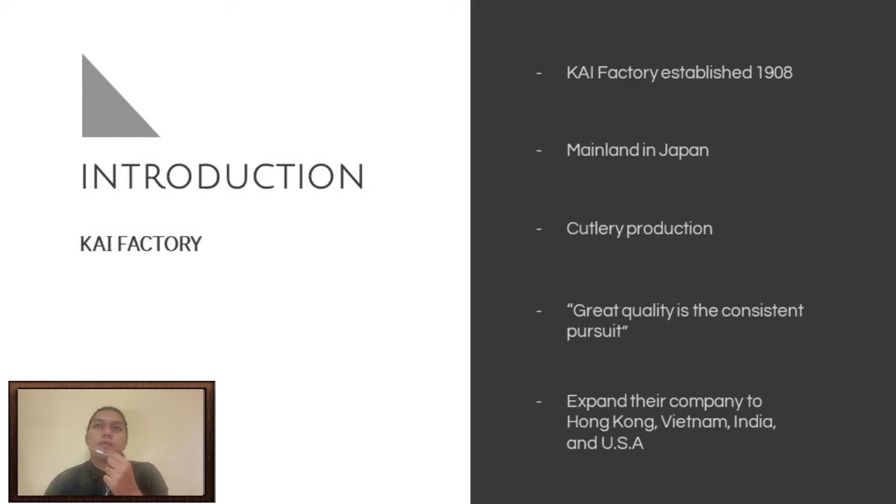In India, this was Kai's newest overseas factory, and it is mainly responsible for the production of razors, kitchen knives, and nail clippers.

At the Hong Kong factory, this factory is responsible for shape forming, assembly, packaging, and shipping of razor blades imported from Japan.

At the Vietnam factory, this factory plays an active role as the exporting base for the Asian and European markets. This factory started from producing razors for females and thin leaf type nail clippers for Japan.

At Oyana factory, Sembiki factory, Tawara factory, and Yamato Tsurugi factory, those factories are in Japan, mainly responsible for producing razor blades, medical blades, and kitchen knives.

At the USA factory, this factory took over an American traditional knife called Kershaw, a traditional American knife. Kershaw is an important part of American people's everyday life, used for opening parcels, camping, fishing. Those Americans always use Kershaw in their daily lives.

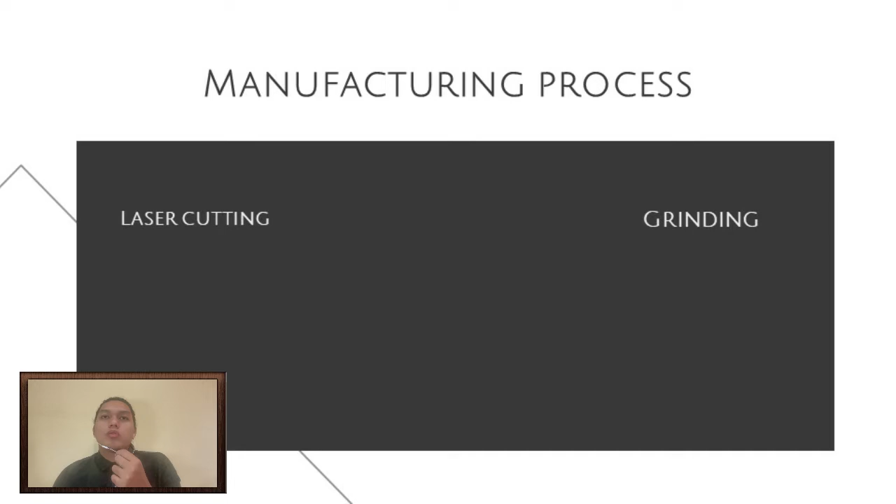Next, the grinding process. The blade surface is polished to make it look beautiful by using a grinder. Then the thermal process is used to get the hardness and tenacity for all equipment produced.

Next, the shot blasting process. This process is used to clean the surface of the tools using particular glass shots against the blade at a high speed velocity, so it will clean the surface.

The last manufacturing process they use is the handle molding process. The handle part is molded by pouring heated resin into a mold set with the blade, and then it will shape the handle for the scissors, knife, or razor that they produce.

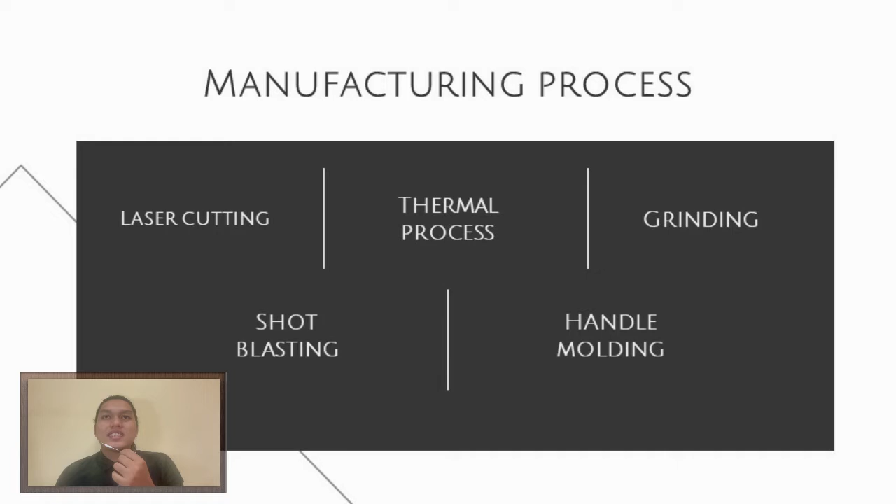The first design concept used by this company is consistently producing blades from its inception. The design was created not just to cut, but the company strives for a sharper and smoother blade, and their endeavor continues. The second one is handmade work for a value-added process.

Most of the processes in Kai factories incorporate handmade work in many production processes, which enables both stable sharpness and usability that cannot be achieved by using machinery automation processes alone.

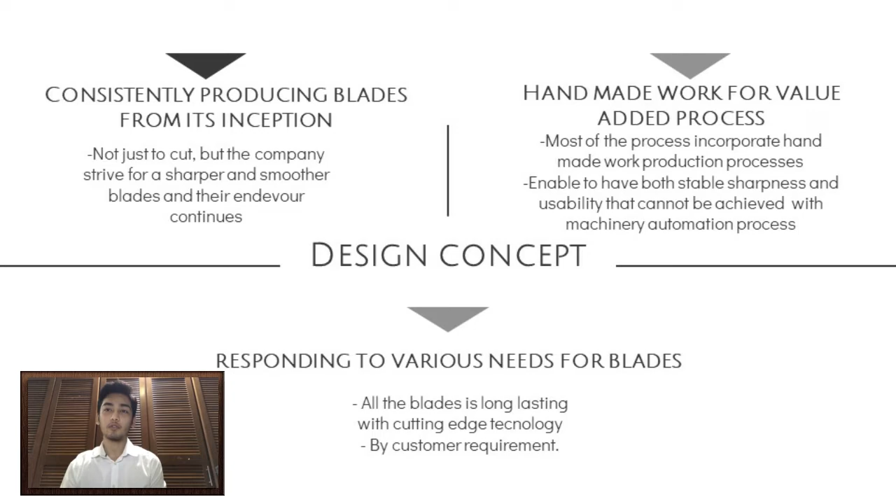The third design concept used by this company is responding to various needs for blades. There are many types of blades serving different purposes, and it's their job to make sure all blade designs can be used based on their purposes at maximum efficiency. All blades are long lasting with cutting edge technology, according to customer requirements.

We continue with quality assurance. The company makes sure the blade technology is accumulated over a long period of history. Also, the company provides a high level of products to anyone, anytime and anywhere.

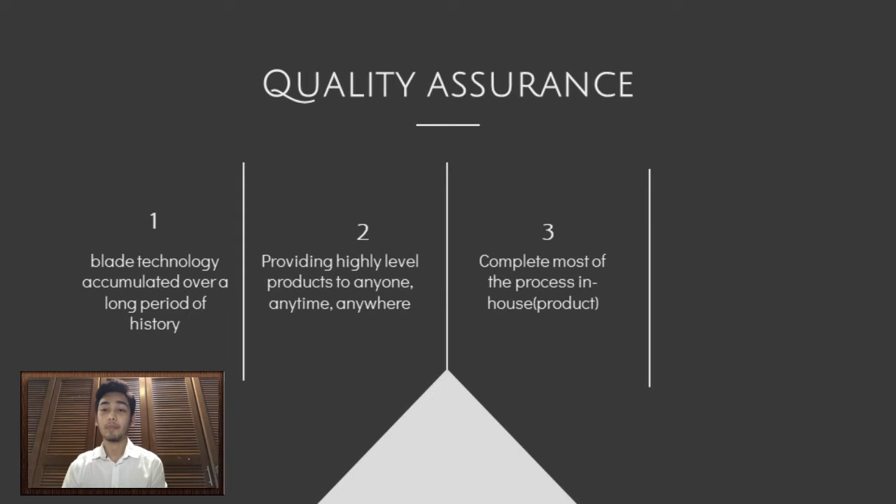To make sure the product is of high quality, they complete most of the process in-house. All the parts are manufactured under one company, even a small screw used to connect blades. This ensures the quality and safety of their product.

The last one is that the company is people-friendly, with factories that produce people-friendly blades. Looking at the motto, which is factories considerate towards people, the company takes care not just of product quality, but also worker safety as well.

What an excellent company! We continue. The products produced by this company are scissors, razor, kitchen knife, nail clippers, and ophthalmic knife.

We continue with the problems faced by the company. Even a big and strong company like this faces problems as well. For example, problems in the manufacturing process, such as forging process defects and heat treatment defects.

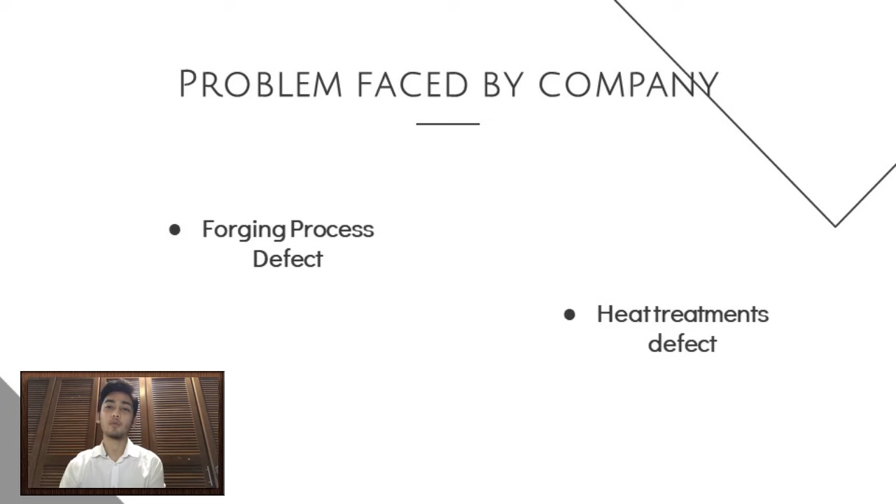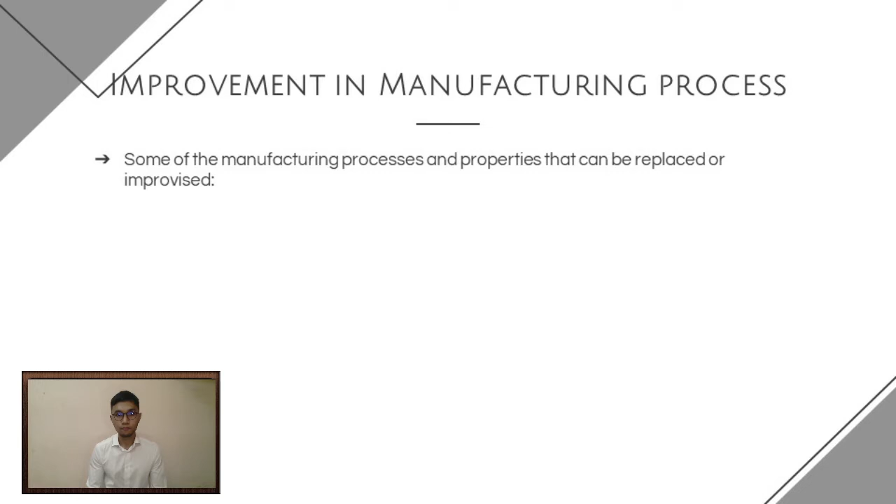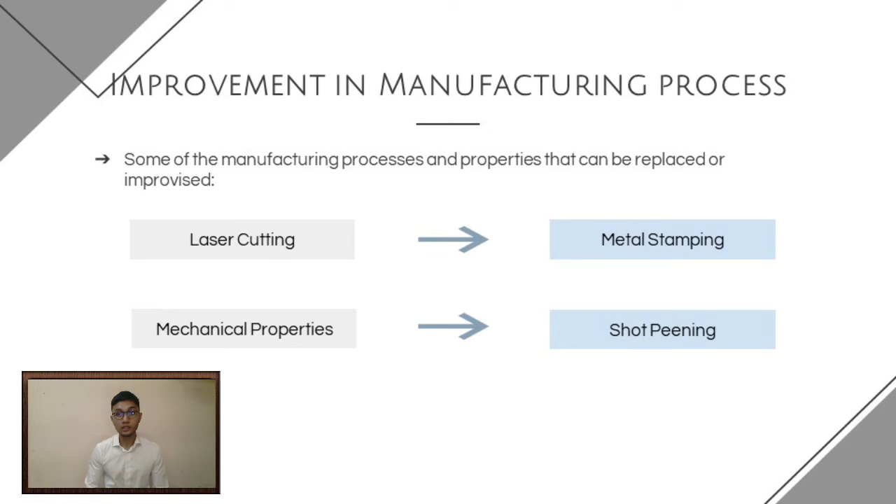To get started, I will first cover our discussion regarding this project, which is what manufacturing process can possibly be substituted or added. For a quick view, firstly, the laser cutting process can be replaced by metal stamping. Then, to increase the mechanical properties of the scissor blade, a shot peening process needs to be added. Finally, shot blasting can also be replaced by sandblasting, but with some modification.

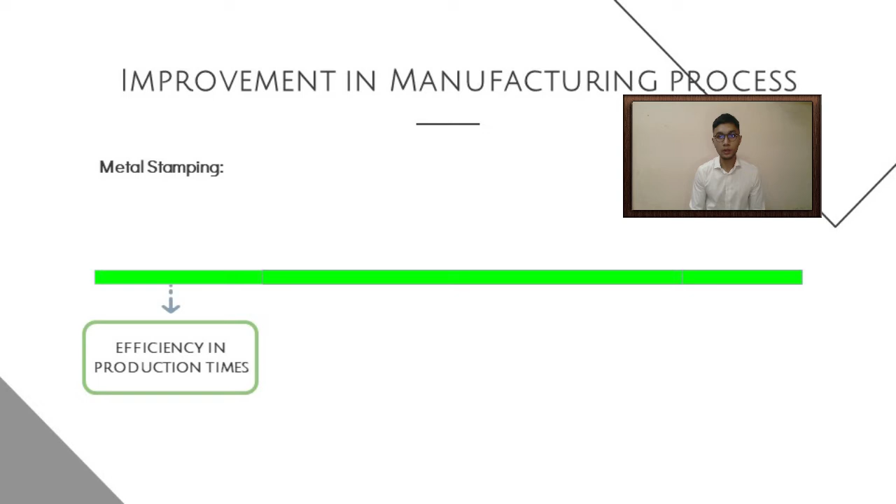Let's begin with the metal stamping process. There are several advantages that make this process good for shaping the blade. First, it is very efficient in production time, producing a great amount of result compared to laser cutting. It also reduces the cost of making the product due to lower die cost and lower secondary cost. Then, it can shape a wider variety of metal alloy. High temperature resistant metal alloy can be difficult to cut with laser because its melting point is so high, so metal stamping is a good choice.

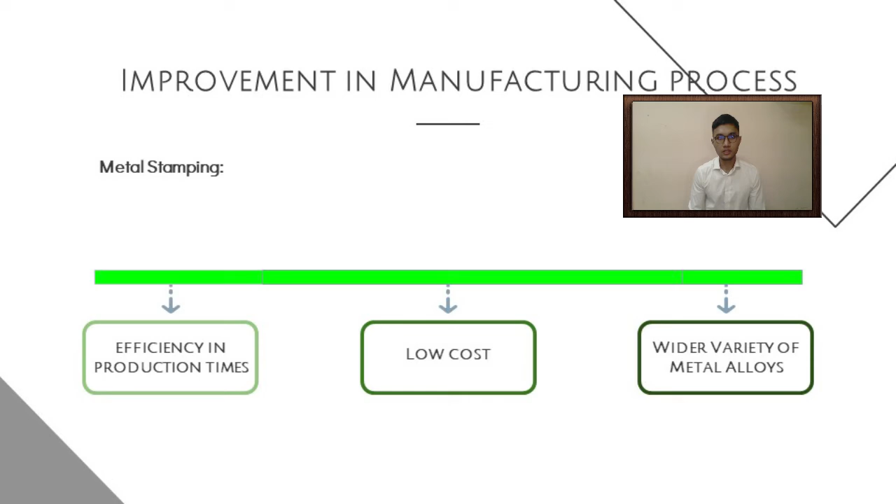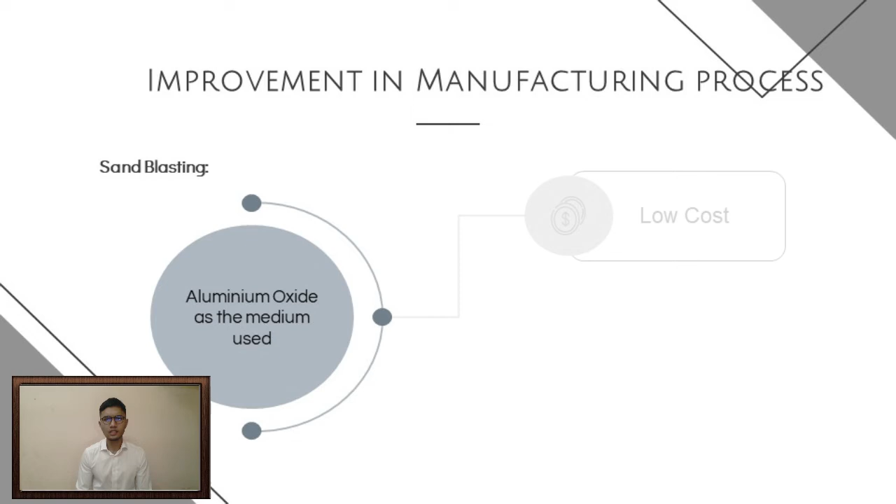Secondly is the sandblasting process. This process can offer a great surface finish, but the medium needs to be replaced with aluminium oxide. The reason is, firstly, it can be obtained at low cost, and it is less time consuming when it comes to surface finishing. In addition, the smaller grain size blasting from the medium is excellent for polishing and smoothing the surface, meaning it can produce an excellent surface finish.

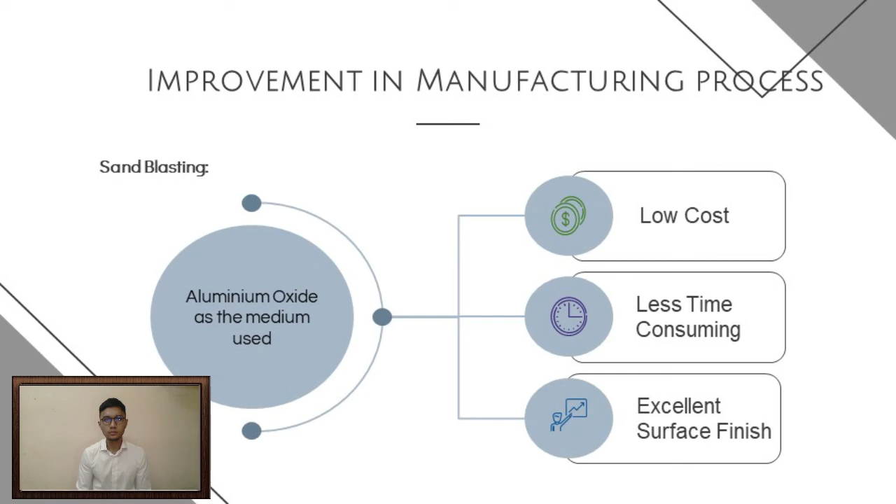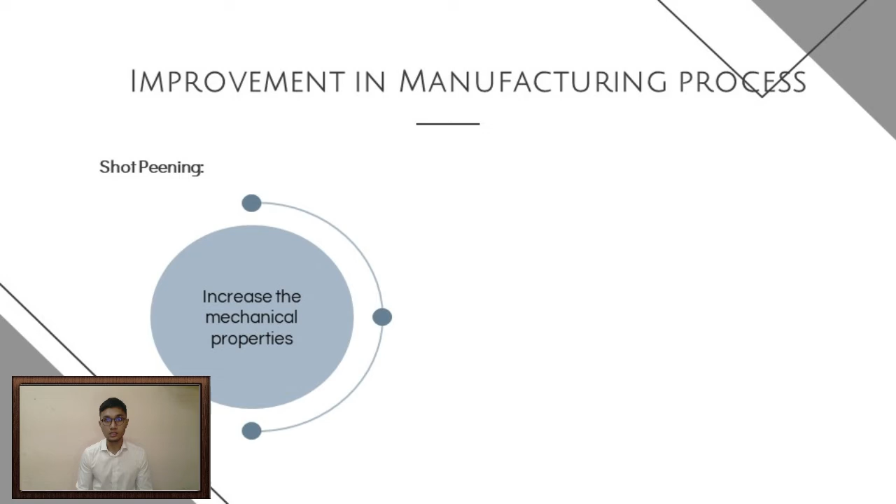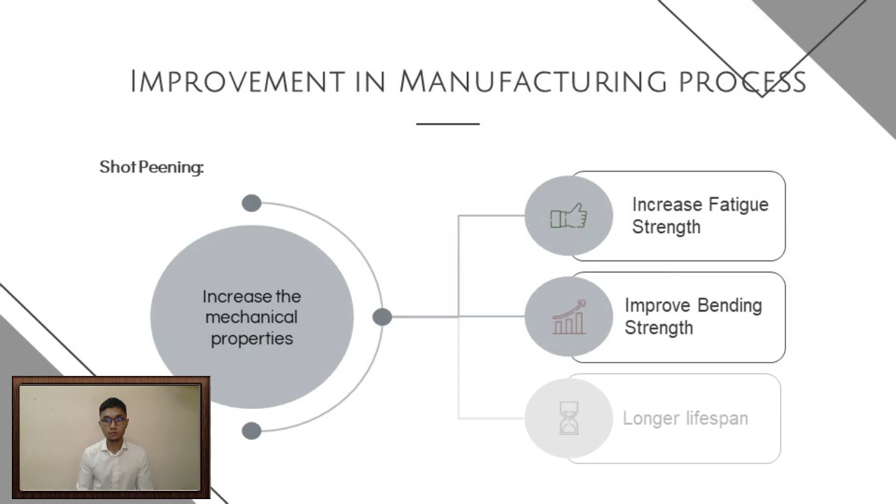Next is the shot peening process. It can be considered to be added since it improves the mechanical properties of the material, in this case the blade of the scissor. Shot peening firstly increases the fatigue strength, meaning it can withstand high stress applied without breaking. It also improves the bending strength, increasing the ability of the scissor to resist deformation. More importantly, since it improves a lot of its mechanical properties under high stress, as a result, the lifespan of the blade will also be increased.

Jumping to the next point, there are possible products that can be produced using the metal stamping process we suggested previously. For example, firstly, it can produce electrical components like electronic relays and computer electronic parts. Next, for house appliances, it can produce products like microwave, toaster oven, and refrigerators. Finally, for construction, it can produce power tool parts, industrial switches, and connectors, for example.

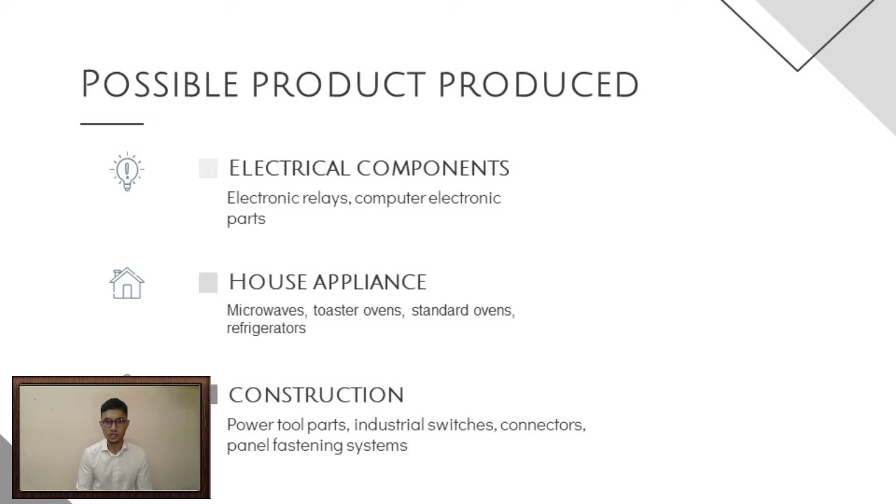So that was the discussion about what can maybe be improvised in the manufacturing process and possible products produced using the metal stamping process. That's all from me. Thank you.

Thank you, Wafiq, for the brilliant presentation just now. Next, I will present ways that can be used by the company as an alternative to solve the problem.

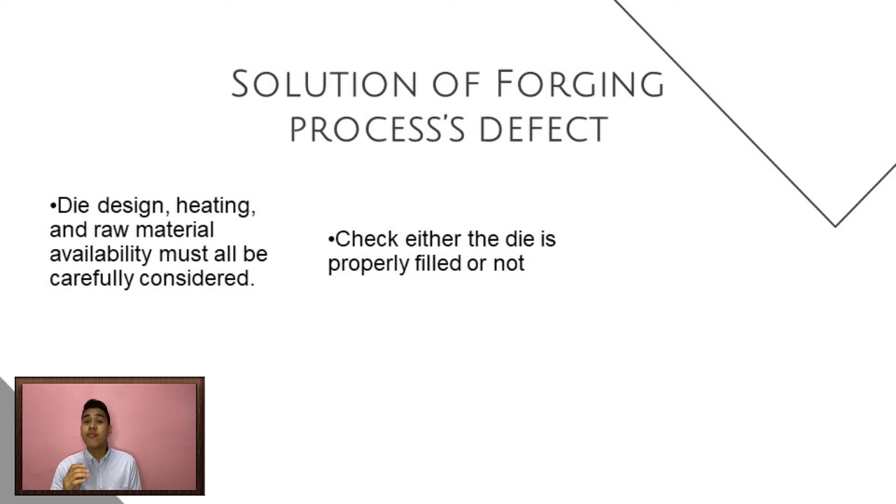As mentioned earlier by Mohamad Razif, there were some defects that might occur during the manufacturing process, which are forging process defects and heat treatment defects. As for the forging defect, die design, heating, and raw material availability must all be carefully considered. We need to check whether the die is properly filled or not to prevent unfilled section defects. Furthermore, to prevent cold shut from happening, this defect can be avoided by properly increasing the fillet radius of the die.

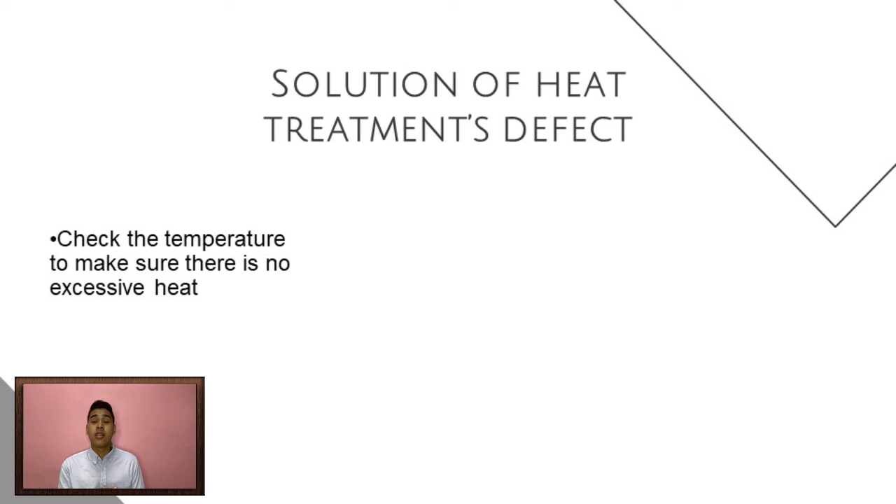Next, I will talk about heat treatment defects. To prevent heat treatment defects from occurring, we need to check the temperature to make sure there is no excessive heat, by using normal annealing and normalizing for slight overheating. For considerable overheating, we can use double annealing and normalizing. For preventing oxidation from happening, we can heat in a decreasing, neutral, or protecting environment in a furnace. Other than that, we can also heat in a molten salt bath.

Moving on to the next solution, to prevent deformation and volume changes after hardening, we can change the material to alloy steels because it is only slightly deformed by hardening. And last but not least, we can also use surface hardening when possible.

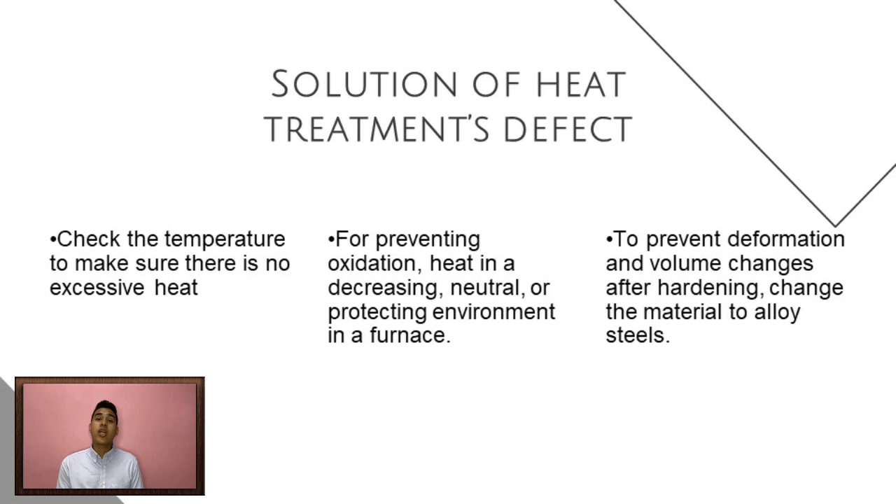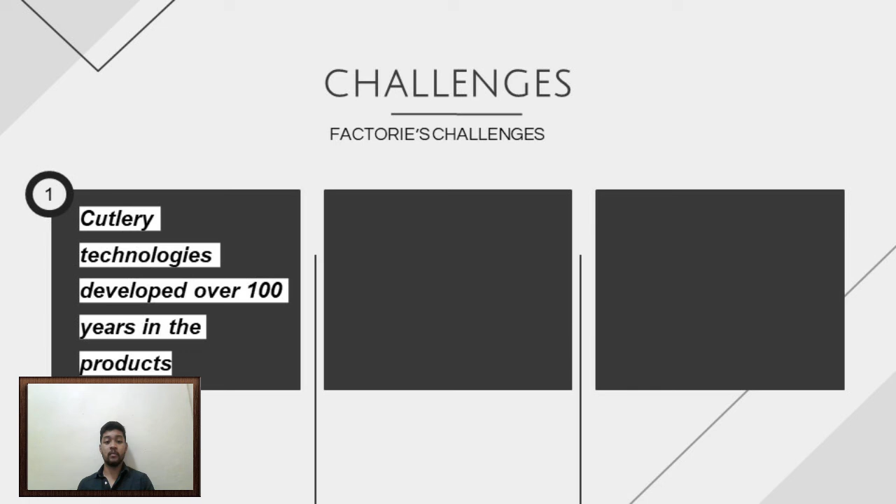The last part is continuous quality improvement. These are the challenges faced by the company. Cutlery technologies developed over 100 years continue to produce cutlery. Kai has been concentrating on production in a simple and honest manner, earnestly throughout its long history, with a diverse lineup of products, and even now continues to evolve everything for the customer holding our product in hand. These are challenges that have been the same now and in the past.

Introducing special metalworking technology to meet a wide range of needs. Kai Factory also aggressively introduces special metalworking technology to produce products with new values. The speed of introducing this different technology enabled a diverse lineup with design, safety, and durability.

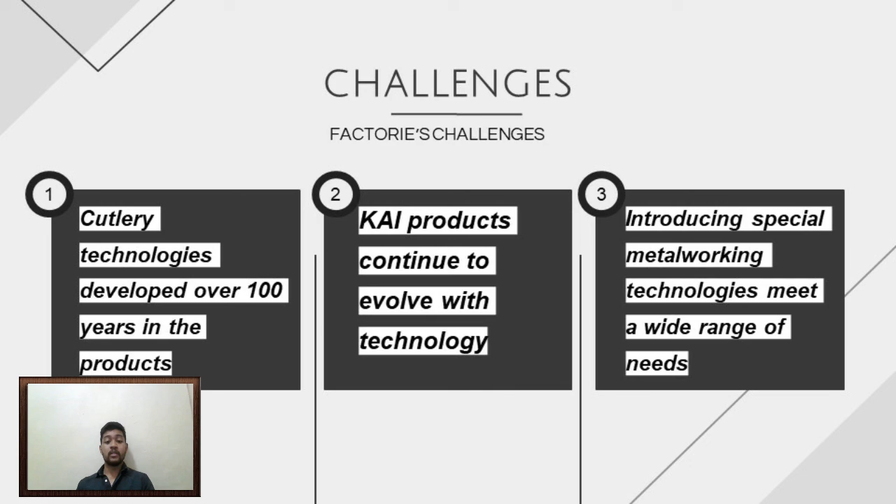And the second part is quality. Providing high-level products to anyone, anytime, anywhere is required in an era of mass production and in a world of mass consumption where no single defect can be accommodated. We tirelessly strive to manage our quality control, and there is no end to our efforts.

Complete the most process in-house. Quality control and safety can be ensured with as many processes as possible accumulated in-house. Many of our processes are accumulated in-house and many parts are self-manufactured to keep an eye on details such as wire, pitch of plate, and interlocking of the two blades.

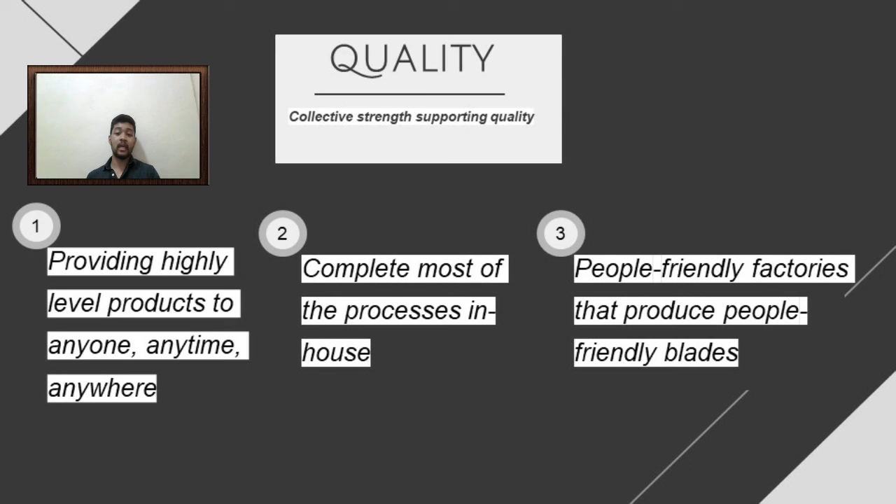And lastly, a people-friendly factory that produces people-friendly blades. With this philosophy, Kai does not forget to consider the people working for us. We believe that human development will help advancement, and therefore we make various efforts. Okay, that's all from us. Thank you.